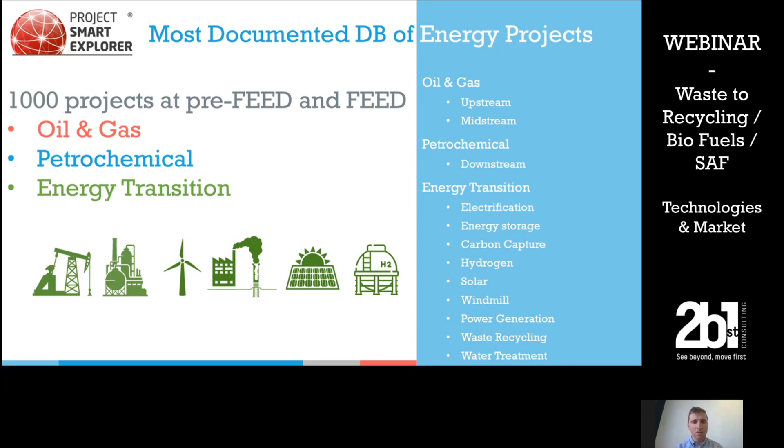Today, from the scope of 1,000 projects, we are going to look at a tiny part of it, which is really interesting because it's one of the most dynamic ones as of today. Into energy transition, we have already spoken about two aspects. We already made a webinar about hydrogen. We already made a webinar about carbon capture, which were the two biggest trends in this energy transition.

But today, we are going to focus not on renewables, which is a big part of the database as well, but more into the decarbonation, and mostly the two aspects you see here on the right of the slide: recycling, so all the waste to energy, plastic, chemical, hydrogen, and bioenergy, and into those you will see the biogas, the biofuel, and the sustainable aviation fuel.

So today we are really going to focus on those applications, even if it's a small fraction of the market today. It has really a big dynamic, as I was saying, and it's quite interesting to check as of today how it's moving, and of course what is behind the drivers, etc. And we'll try today together to understand what are those trends.

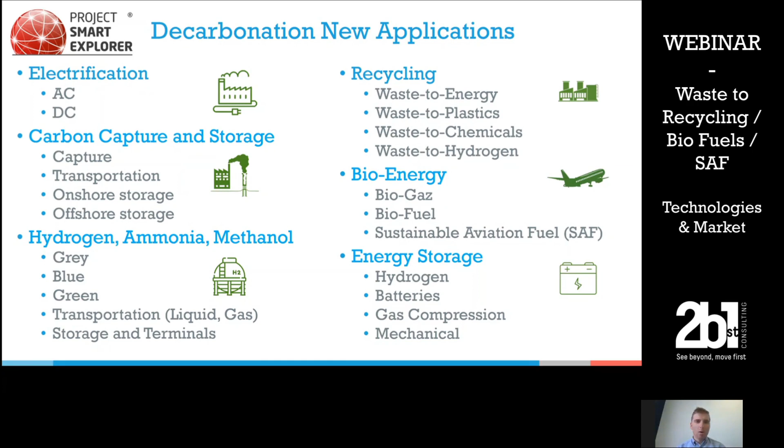So the need and the trend of those applications, I will always try to go in this order: waste to recycling, biofuel, and SAF. Biofuel and SAF will mostly be associated because behind it's more or less the same business and the same application. But okay, we will go in detail case by case if we need to.

If we look from the broader view, from the global perspective, what is happening today in the world, mostly in the world of energy, today the challenge of the energy transition is, if we look at the broader picture, not to go into renewables, not to go into decarbonification for the sake of it. The idea is to reduce the annual global greenhouse gas emission, which is responsible for the climate change.

This is the broader picture. Here I put an extract from the report of the GIEC from this year, where they are trying to make scenarios to say, depending on this amount of greenhouse gas emission, we will live in a world where the average temperature has gone plus 2 degrees, plus 4, minus, etc. So you see here different scenarios.

And the effect behind, and the pressure we have as of today on oil and gas, not only oil and gas users but also oil and gas producers, is to say, okay, we need to reduce this global greenhouse emission. Of course, the oil and gas industry is one of the first on the front line to tackle this problem, because it's somewhere responsible for the production of CO2, but also for the production of products which later will produce CO2, even if it's by the means of many users and many layers of our industry.

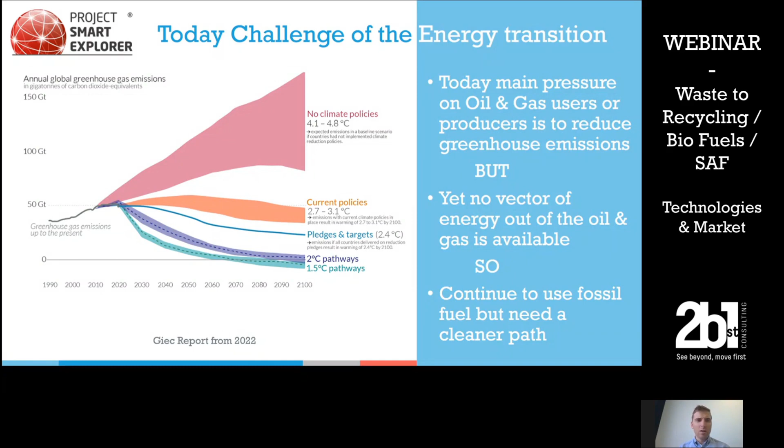So for this, we have discussed already about hydrogen, we have discussed also about carbon capture, and today we are going to discuss waste to recycling and biofuel, because that's another way to do that - to carry on using those fossil energies that we know how to use, we master, but to do it in a cleaner way. And what is the idea behind this concept of waste to recycling and biofuel?

The idea and the main concept behind is to close the carbon life cycle.

On the left of this slide, I try to picture a little bit the carbon life cycle that we have as of today, which is in blue, meaning that we start from natural resources inside our planet, which can be under the form of wood, gas, coal, or oil, and we extract this energy and this carbon from our natural resources. We go from this extraction to process this energy, to transport it, and at one point to use this energy, but the whole means of it, and then it will go either into CO2 into the atmosphere, or we will have a part of this carbon which will remain as disposal, in the trash or in many other formats.

The idea is not to stop the carbon loop here as we are today. The idea is to close this loop to have a kind of circular economy. I know it's a trendy word, but that's a little bit the concept behind it: we are going to close the loop and the life cycle of the carbon to make sure that we are always using the same carbon and not releasing more carbon than what we are doing actually.

That's where applications like waste to recycling, biofuel, and SAF are starting to exist. The idea is to build this missing step between the disposal and the energy extraction. Because even if we have used those fuels, there's still carbon in it, there's still value in it, and the change is to say, let's reuse them to make sure that we can extract or reuse them to produce more energy. So that's a little bit the idea.

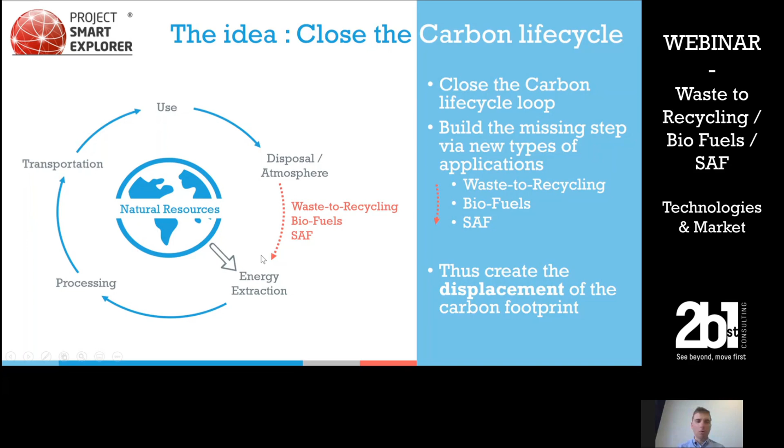If we look from the carbon footprint picture, closing this loop is going to create an effect which is called the displacement of the carbon footprint. Because of course, if you source energy extraction from those raw materials, you take into account the carbon footprint you have avoided at this step, but you are also creating one at this other step. In more detail, I've got this slide to explain it with a really easy example.

In this case, we are going to talk about wood and the carbon footprint of wood. We took wood because it's the simplest example, but it will be the same logic for all the pieces of material you can use to source and feedstock those applications. Imagine you have wood. You may have wood inside your house, but most of the wood today, as trash or waste, is going to decompose into the air, etc.

What is really interesting is that wood decomposition is a long process, but today this decomposition will create two things: methane, which will be released into the atmosphere, and solid carbon, which will stay more or less in the ground. So today, this is the main path for wood to disappear, to be wasted and recycled in one way. But the carbon footprint of this process is huge, because as we all know, methane is a huge, guilty gas for global warming.

So the idea is to replace this decomposition with two possible ways. Either you use this wood as biofuel and SAF, using the carbon stored in this wood to create biofuel. And when you use this biofuel, the fuel is going to release CO2 when burnt. But the compensation is that all the energy you would have spent to create this biofuel will not impact the atmosphere as badly under CO2 emission than what it would have been under methane.

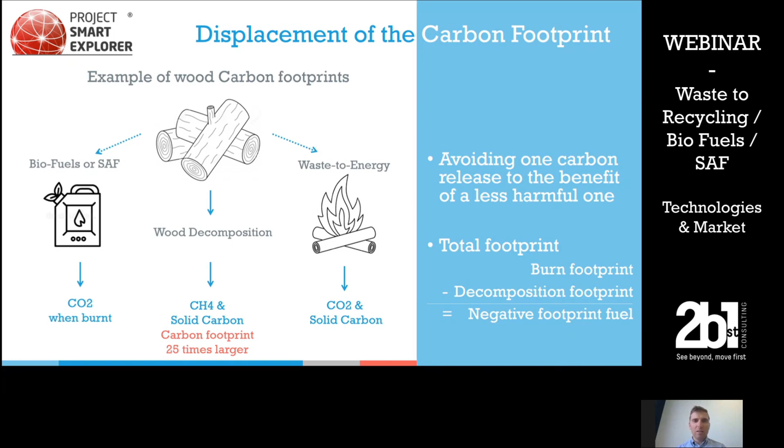Which means that in some cases, mainly for SAF, reusing that waste is going to generate plants which are called carbon negative. Even if those plants are emitting a lot of CO2, they are replacing a situation where there would have been emission of more harmful gases. So by creating those plants, by sourcing feedstock globally on the planet and looking at the life cycle of carbon, you are going to have a better, less harmful impact than what it could have been. That's a little bit the trick behind it.

So now the reason for this trend and these applications is that they have many advantages. The first advantage is that when you use biofuel, or SAF, or recycle plastic, you don't need to adapt all your industry or all your users to a need for new energy. That's not the case if you turn from fuel to hydrogen, or from fuel to green electricity. Here, no adaptation is needed because the end product and output are exactly the same.

Of course, the idea of closing this carbon cycle is quite virtuous, and we can all understand why, because we are able to reuse our energy on an unlimited basis. Of course, it's not totally true, but kind of. Then the third aspect, which is today one of the most important, is that by using these applications, you can have a neutral carbon footprint on your application and your usage of fossil energy. And you can even have, in some cases, a negative carbon footprint, which is even more interesting.

Then if we go more into execution detail, the chemical processes behind are well known. They are mastered - we have worked with those in the chemical industry for ages, if I may say. These applications are quick to deploy. If we compare that, for example, to green hydrogen, where we are trying to scale up our know-how, here we are talking about processes where we have more maturity and where all the equipment is already available.

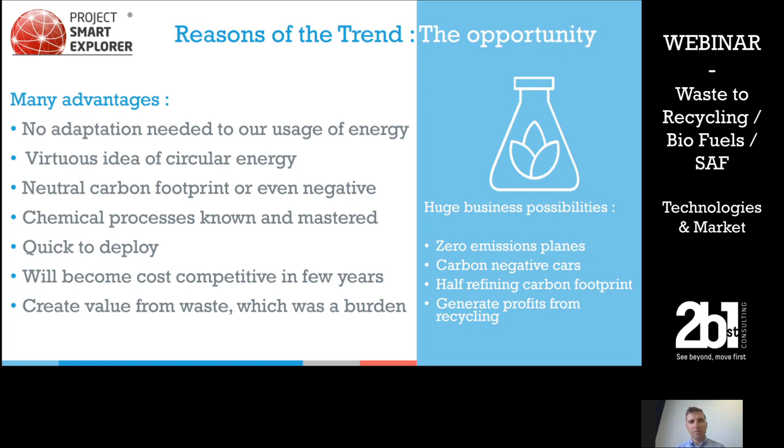So that's a little bit all for the need and the trend. The need is to save the planet and save our environment. The trend is coming from the effect of negative carbon footprint on the global picture, but also because it's becoming quite competitive to have those applications as feedstock for raw material.

So now if we look more into the technologies, I'll break down a little bit more per application. It's interesting to see, if you come from the oil and gas industry, you have to see those applications a little bit like downstream. Meaning it's not an extraction of carbon from the ground, as we have in oil and gas.

It's more the transformation of carbon which is already there. So it means you will not have what we call the production and all this upstream part in this supply chain, meaning you will never see a waste-to-recycling, biofuel, or SAF project offshore, in the middle of nowhere.

Usually, those projects will be located close to the users or close to the feedstock that will be used to run those processes. What's also interesting is that those products will be replacing a little bit the crude oil or gas produced, as we may have, as feedstock for then refining product for crackers, etc.

These feedstocks may happen everywhere, because when you think about where you have plastic waste, bio waste, etc., it can really be everywhere. The idea is to deliver that feedstock to the location where we have those plants, or to create a multitude of those applications.

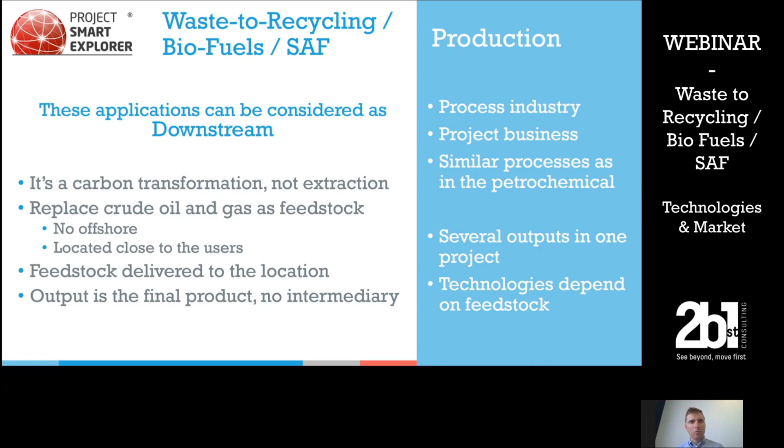That's why we put this slide at the beginning - the technology and process we're going to use depend on the feedstock itself. Because of course, it's not the same if you have banana peels versus if your feedstock is plastic or domestic waste, etc. So that's what will be our key point of entry to go see our application.

The first thing is to say, if we have waste which are polymers, what are the processes we're talking about? In this case, under polymer we are talking about all the plastic you find around the world. It can be PET, polyethylene, polypropylene, etc.

From there, you have different ways to recycle and create value from plastic waste. The first one is waste to plastic or waste to chemical. There are two processes that can be put in parallel. The most well-known, and the one implemented today but which will grow in the future, is mechanical recycling. The idea is you collect your waste either at the production site or after it has been used.

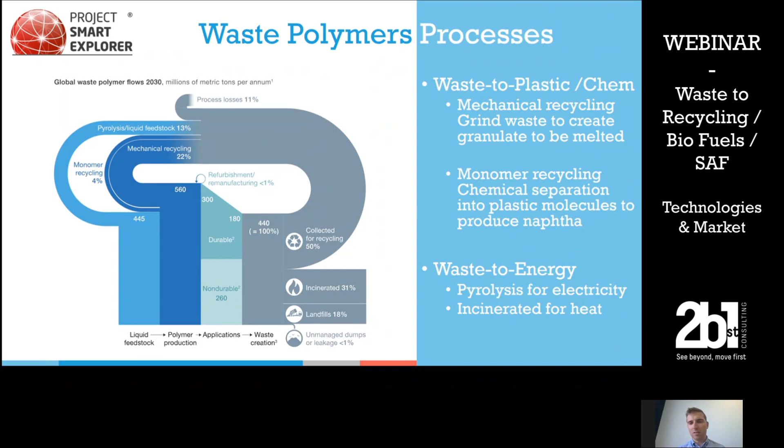If we go not to the plastic waste but to the domestic waste, just to make the difference: plastic waste or polymer waste is the one you filter and put in your yellow trash if you are in France, but domestic waste is more random. In Europe, I think it's the gray trash in all countries, where you just pour everything.

The first one is, of course, waste to energy, because if you burn it into pyrolysis, you are going to produce electricity. If you burn it at a lower temperature, you incinerate it, producing a lot of CO2, which is not good, but it's better than just leaving it in the air, and at least you will have some heat that you can reuse in the location area of this plant. So that's the first process, which is today really well known and in practice in many countries around the world.

Now we have two other processes linked to domestic waste. The first one is waste to hydrogen. That's a new process, completely new. I think we have 3 projects in the database about waste to hydrogen. They are really pilot, really demonstrator projects.

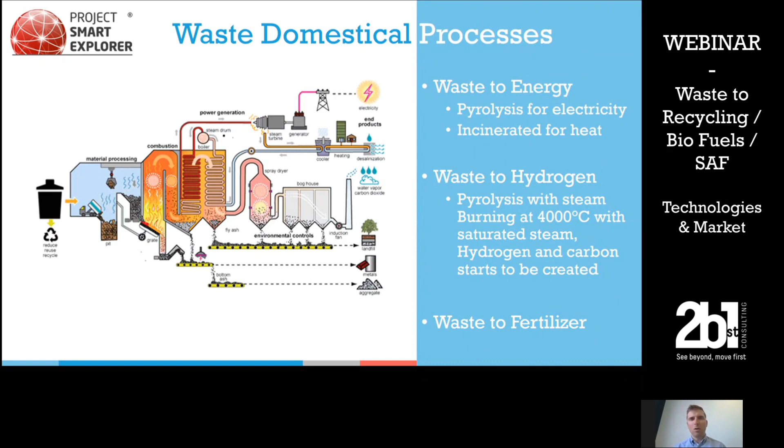And here in this case, we have 2 big families, if I may say. The first one is thermal treatment, where by pyrolysis or just heat, you gasify your product and extract the carbon from there. But you are also able to make what we call pre-fermentation, meaning keeping it as it is and letting the deterioration effect happen in a closed environment - that's the difference from the open environment.

And there you will be able to collect biofuel, biogas, charcoal, syngas, synfuel, but also if you refine it a little bit, some SAF, sustainable aviation fuel. And this is today one of the main ways to produce what we call clean fuel, etc.

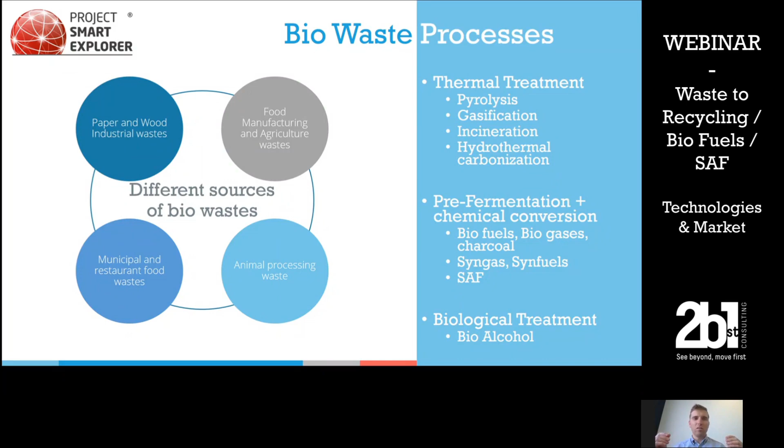The idea of those fuels is that their carbon footprint is negative. So of course, if you mix it with existing fuel, especially for planes, you are able to have a plane which is net zero carbon fuel.

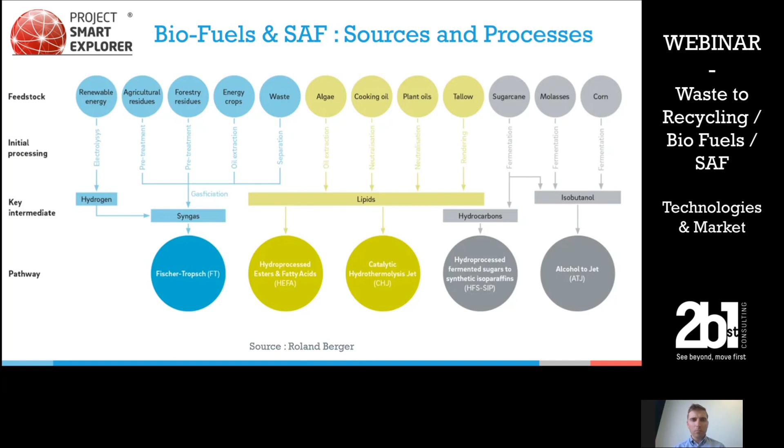But the CO2 that will be emitted will be less than the CO2 that was captured from the trash. So this whole cycle and value chain is beneficial for the environment. So what we need to understand is that we have to consider those projects as a side supply of raw material and raw carbon material. Today it's integrated and starts to be mixed with existing assets, and the results are quite positive, to be honest.

The quality in some cases can be questionable, but with the price of raw material going to the roof as of today, we know that we can add some treatment and pre-treatment to make sure we have the right quality needed for our application.

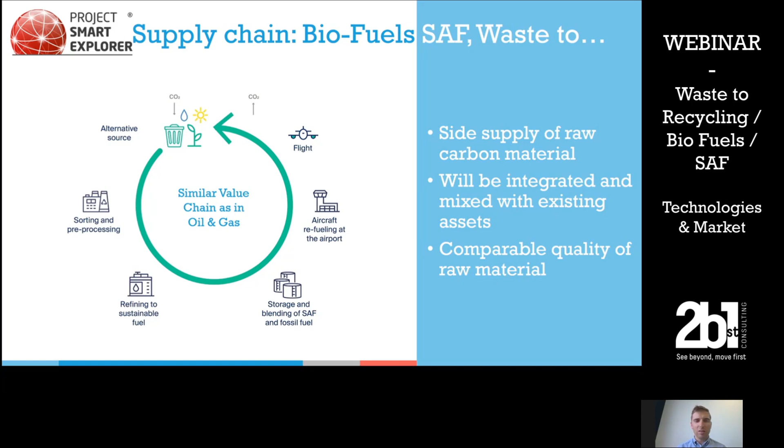That's also because that's where you have the need and the production of feedstock. Because if you want biofuel or want to recycle plastic, you need to have a source of plastic, you need a source of bio waste, and of course those three regions are the ones with heavy population and a lot of consumption of many materials, etc. So that's why we see a lot of those projects happening there. But just so you have in mind, those will be the three hubs as of today, and that's where things will develop more generically, meaning US and Europe are really leading the game in these cases.

If we look at the type of project behind, about 80% of those projects are small projects. It doesn't mean they are pilot or demonstrator projects, because as I was saying, the technology is quite mature. The average capex of those 80% of projects is about $100 million US, so it's quite big. But then, depending on the application, it can be small or big. In the database, you will find biodiesel, bioethanol, SAF, waste to recycling, etc., which are quite big projects.

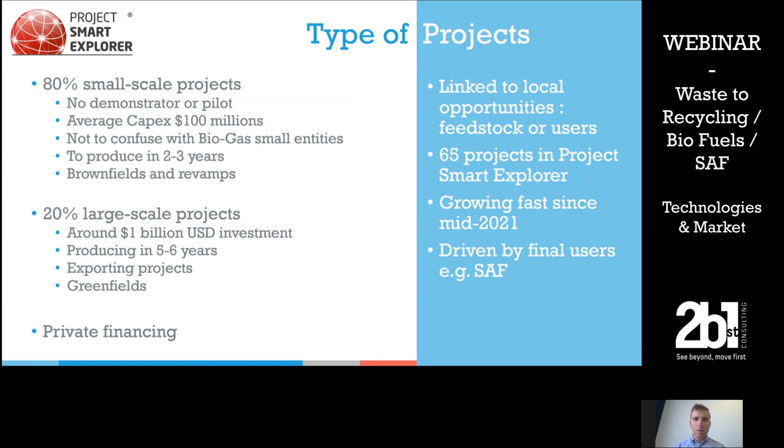Here you have the figures for waste to recycling. On the left you have the forecast on top. You see it started really in 2021 as a small piece of about half a billion, but it's going to double more or less every year on what we see as of today. If it's going down after 2024, it doesn't mean that this market is going bananas - it just reflects what we see of the market as of today.

If you look at what has been awarded EPC-wise, you see that most of this market has already been awarded, meaning those projects are financed, and when they are financed, it's mostly dominated by independent companies - that's the figures you have on the right. But those small operators are coming from the chemical industry or coming with licenses, and of course they are the ones making the engineering as well, the construction, etc. So they have their hand on all the project life cycle. It's quite interesting because that's only one person you need to talk to, to be sure that your project or your product and equipment are well placed on the project.

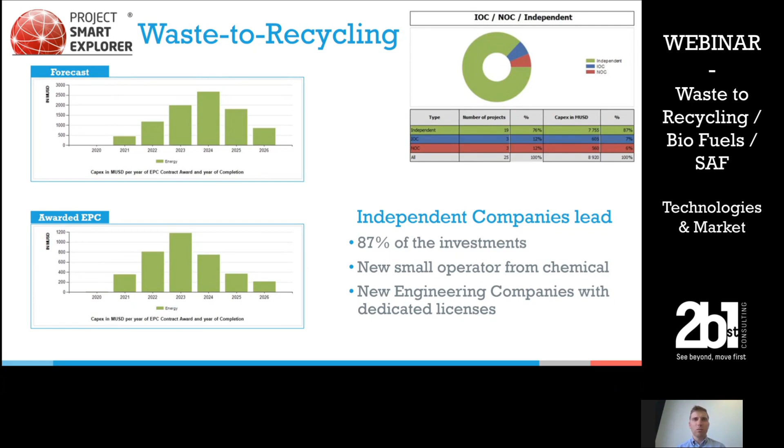As I said, the life cycle is 2-3 years, so of course you need to be quick and you need to be upfront at the FEED stage if you want to be sure to get the order later on at the EPC stage.

For SAF and biofuel, the situation is a little bit the same, even if we saw it grow a little bit earlier - we started to follow it in 2018, all those applications. But in 2021, when the calculation of carbon and the displacement of carbon footprint was created and accepted by the international community, those projects took a huge momentum. That's the effect we see as of today - you see the different stairs we are taking where it's completely ramping up.

And for projects which are 2-3 years long, we see that here we have phase 1 development, but we already start to have those phase 2 behind, which are coming to fuel this pipeline until 2026.

And of course, it would grow like crazy. You see what has been awarded. We are totally in this situation where the market will grow bigger and bigger, exponential growth. Independents are also on the lead. It can be complete startup companies, or people originated from the chemical business who are going a bit upfront into the chemical.

All those projects, and that's true for waste recycling as well as biofuel, the FEED contract is converted to EPC. Only a few exceptions go to an EPC bid, but most are conversions from FEED contract to EPC. The most active players we see on this market are the mid-sized engineering companies. We don't see too much Technip, Saipem, those big boys, although the American ones, we see mostly some niche experts on those applications. So it's also quite interesting to look at because the competition is way lower on those.

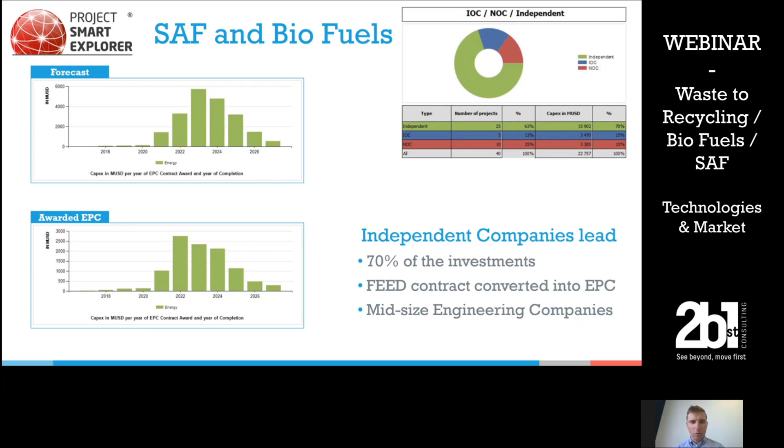Now if we look on a longer perspective, I'll put two deadlines, 2030 and 2050. Why those two deadlines? The first one, because the 10-year period is to say okay, what will be done as of today, the action we see. And 2050 is, okay, what are the goals? Because most of the Paris agreements, etc., regarding the limitation of CO2 emission and greenhouse emission are linked to a deadline which is in 2050.

So if we look and start by waste to recycling, and that's true for plastic, but that's true for all those polymer activities, you see on the left the global polymer demand. And that's something most of you are users of Project Smart Explorer, we had the chance to run and discuss this point during the workshop. But globally, the polymer demand is going to explode in ethylene, in polyethylene, in propylene, etc. All the plastic usage is going to explode.

But on the opposite, we are not able to produce so much more. So of course, and here you see it's quite conservative figures, but in 2020 we are a bit around here. The right number is today we are about 500 million metric tons of polymer demand, so we are a little bit higher than this scenario, which for us is a bit conservative. But you see the explosion of need of polymer. And of course, crude and virgin ethylene will not be able to replace and answer all this demand. So that's why this waste to recycling is going to take huge momentum.

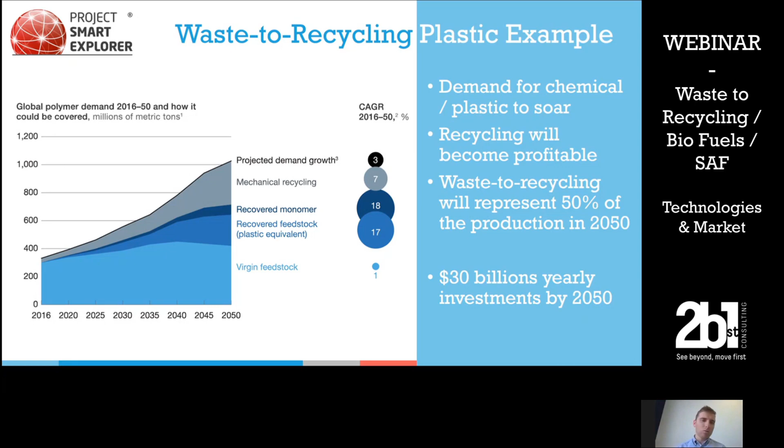And you see that in 2030, it means that we'll grow about 50% compared to what we have as of today. So it means that in 10 years' time, this market can be around already 10 billion yearly. When you see the size of project, about 100 million, it means that it will be tons of project and tons of opportunity already.

If we go to the SAF, the Sustainable Aviation Fuel, it's a specific trend as of today that's taking off, because the goal of many aviation companies is to say you can fly carbon-free. And of course, that's a huge competitive advantage. If you are Boeing or Airbus, you don't have many opportunities to decarbonate your industry.

The electrical plane will never fly, it will be too heavy. And going hydrogen is a huge problem because the density of hydrogen energy is too low to have a flight crossing the Atlantic Ocean. Which means SAF is technically the only possibility they have to decarbonate their industry.

If you look at jet fuel today, it represents about 8% of oil consumption, about 8 million barrels per day, which is a huge volume. In a few years, when COVID will have stopped, it will still represent about 8 million barrels per day. And this volume of jet fuel is going to double in demand in the coming years. Over the next 30 years, demand will go to at least 16 million barrels per day, which is huge.

What is happening with SAF is that when it's produced, it is so carbon negative that you can mix it with fossil fuel and still have a net zero jet fuel. So today, the ratio of this blend between SAF and jet fuel is about 3%. That's the figure we are going for in 2025.

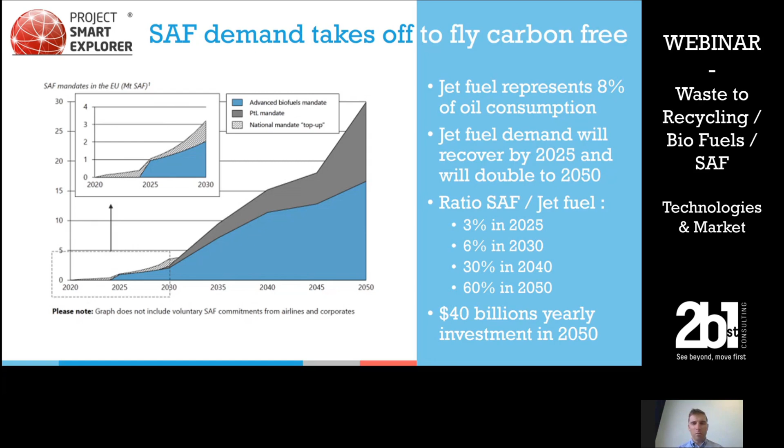If I go to biofuel, what is interesting for the biofuel industry today is that those biofuels are really linked to the car industry, and demand for biofuel will grow everywhere. We talk a lot about electric cars, but imagine tomorrow if we are producing biofuel which are carbon negative. Everybody will want to keep their car, keep the installation of the pump station, etc. By using your car, you will decrease the carbon footprint of the world, so everybody will be happy to do it.

So just by itself, biofuel to be used in trucks, in heavy transportation, or just to be mixed to reduce the carbon footprint of refining activities, will represent for sure 30 billion every year of investment.

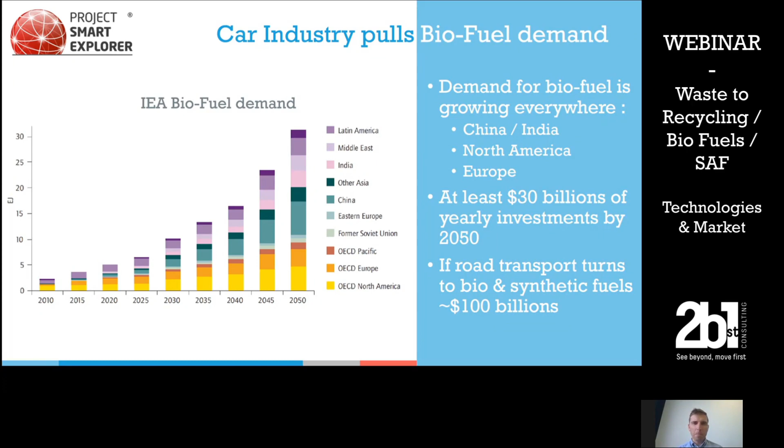Now we're going to a conclusion, and I see the time is running. The idea behind this application is that we're seeing an entire new market emerging. I'd say the key driver for this revolution was enabling, in the international community, the calculation of carbon footprint, where you could displace the carbon footprint from the decomposition of carbon material into its reuse. So those markets are trying to prove themselves a little, trying to find their footing and develop the technology bricks to scale up those activities.

Once again, it's a scale-up they're looking for, because most applications of waste to recycling are already known, but those projects were at the size of, let's say, communal or local communities. Today they're really going into industrial mode, into billions, etc. So they still need to adapt their technology a little.

What's interesting is that the wave is starting right now—the project and first financing started pre-FEED in, let's say, the second half of 2021, which means today we're starting those FEED projects, etc. So it's quite important to get on board today, because if you're not on the FEED, you'll never be on the EPC and you'll never build your reference list.

What's also important long term is to see that demand will steadily grow at a really high level until 2050 at least. Beyond that we don't know, but already in 2030 the market will be comparable to petrochem, because if you add all those layers, in 2030 you'll be around 50 billion already in terms of project on a yearly basis. So it will be a huge volume of opportunity. It won't be as big as petrochem, but it will be somewhere comparable to it, and it's a brand new business that's growing up.